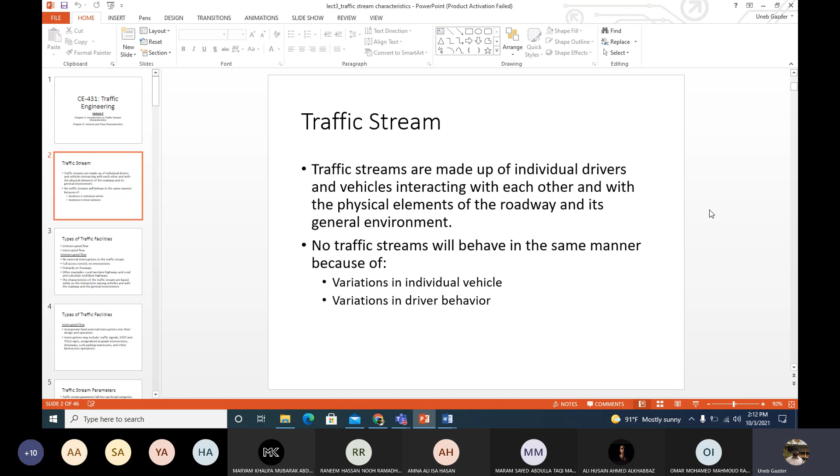Okay, so we don't drive properly at any time, right? One reason or the other. So driver behavior changes according to time and location and direction and weather conditions and so on. So traffic stream also changes. Because traffic stream is made up of vehicles and drivers, and these things change at different locations and times, we cannot expect the traffic to move in an identical manner at different locations and times.

According to traffic flow, we have two types of facilities: interrupted and uninterrupted. If you remember, in the first chapter, we discussed types of highways according to function. That was arterial, collector, and local roads, right? This classification is according to type of traffic flow you are allowing on the road. Traffic facilities are basically also highways, and when we classify highways according to traffic flow, we have only two: uninterrupted and interrupted.

Uninterrupted flow facilities are those facilities which do not have external interruptions. Now, what are external interruptions? Traffic stream, as I said earlier, is made up of vehicles and drivers, right? So any interruption which is caused by something external which is not part of traffic stream itself, like a stop sign or a construction activity, is an external interruption.

So a highway which does not have these things is an uninterrupted flow facility. Those highways do not have external interruptions, and they have given another clarification here, basically meaning no intersections.

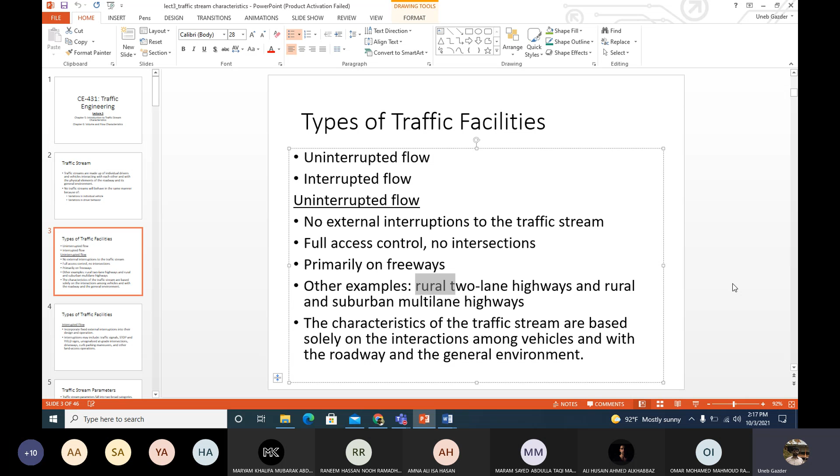Then we have interrupted flow facilities. Interrupted flow facilities have fixed external interruptions. The word external I've already explained. What we mean by fixed here is something which is present on the highway whenever you come there. So let me give you 3 examples and you tell me which one of them is fixed. A, interruption because of construction activity.

B is interruption because of a traffic accident. C is interruption because of a traffic signal. Which one of them is a fixed external interruption? Traffic signal. Okay. Anybody who has any other idea? Construction activities, Doctor. So you are saying A. Okay. Anybody who is saying A or B? Most of you are saying C.

C. Yes, you are right, C is the correct answer. Signal is the correct answer because construction activity is also not supposed to continue forever, right? It is supposed to end at a particular point, so it is not a fixed external interruption. So I think you have the idea from this example of what we mean by a fixed external interruption. So a traffic signal, a stop sign, a yield sign. American terminology is yield and the British terminology is give way.

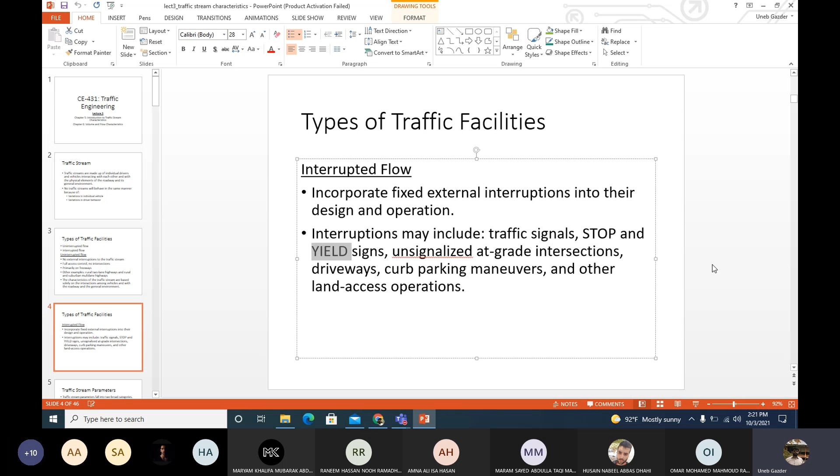Obviously, it is fixed. And any other land access operation: there's a gate of a house or a gate of a shop which is directly connected to your street or directly beside your street, a main gate, back door, side door, whatever. That is also a fixed external interruption. So all these are examples of fixed external interruptions. Highways which have these types of interruptions are interrupted flow facilities.

Then we come to traffic stream parameters. A parameter means something which is used to measure, data on an item which is used to measure something. For example, temperature is a weather parameter. You measure the intensity of weather using temperature.

Similarly, the level of water is a parameter for rainfall. We have that much accumulated water, so it's a rainfall parameter by which you can measure the rainfall. In the same manner, we have traffic stream parameters by which you can measure the flow of traffic. And these parameters can be macroscopic or microscopic.

Now, who can tell me the difference between the words microscopic and macroscopic? Just a word. What is the difference between the two words macroscopic and microscopic? Size. Micro is not visible to the eye. Okay, you are correct. It's size. Yeah, it's the general body. The main difference is the size.

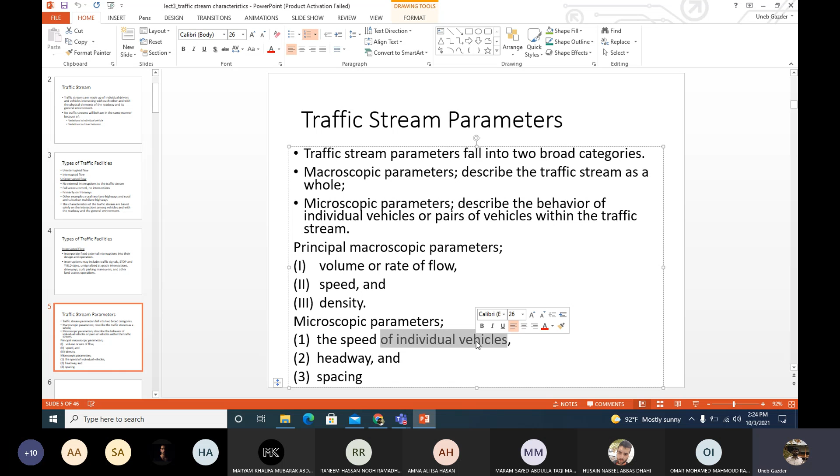What is the difference? When we take speed as macroscopic, that is the average value for all vehicles in the stream. So you measure different values and take the average, then you are giving me speed as macroscopic. And if you tell me that particular car had a speed of 60 kilometers per hour, you are giving me speed as microscopic, which is why it is mentioned clearly here, speed of individual vehicles. That is microscopic.

Now we'll start the discussion with macroscopic parameters, starting with volume and flow rates. Volume is a general term defined as the number of vehicles passing any stretch of the highway. That stretch can be one point, one lane, one direction or even both directions of the complete highway. Number of vehicles passing any stretch of the highway in a unit time. That is the general definition of volume.

Now the unit of time for which you are taking the number of vehicles can be different, and on the basis of that, we have subcategories of volume. So volume can be classified on the basis of the unit of time for which, obviously, this is done.

Can you hear me? Okay. Yes, Doctor, yes. Okay.

So when you say the word volume, now I'm coming to a more refined definition of the term volume. So volume is when the number of vehicles are measured or calculated for 1 day or 1 hour. So volume is when you are observing or measuring the vehicles for 1 day or 1 hour, vehicles per day or per hour. Okay, that is volume.

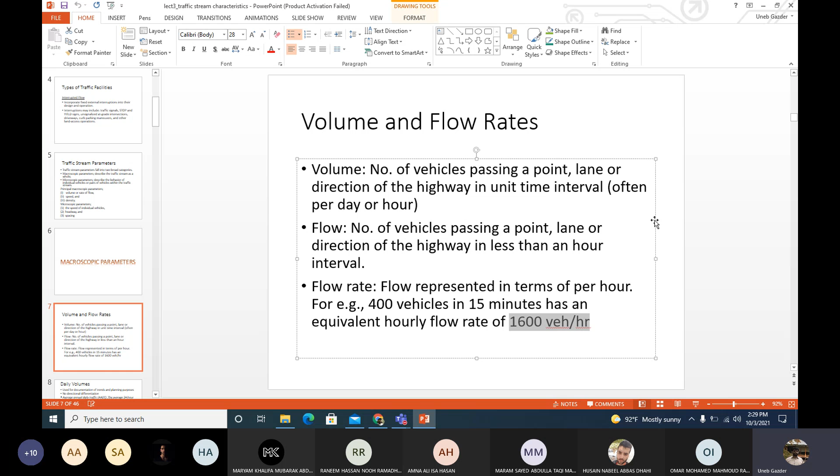So this 1600, which is calculated by using this 400, will not be called volume because that was not actually measured or observed for 1 hour. This is calculated using the flow. So we call it flow rate or rate of flow. So volume is when you actually observe or measure it for 1 hour, and rate of flow is when you took the flow value and you convert it to a per hour rate, that is rate of flow or flow rate.

Then volumes, like I said earlier, can be per day or per hour. So now we are talking about daily volume, volume which is observed for 1 day. Daily volumes are used for documentation, studying the trends, and doing the planning. So when you are observing the trend of traffic for, let's say, the last 10-15 years, then we use daily volumes to study those trends. Or if you are calculating volume for 10 years from now, 20 years from now, then you will also use daily volume.

Another important characteristic of daily volume is that it is the combined value for both directions. So you take the value from each direction and then you add them together for daily volume. So if I say daily volume is 30,000 vehicles per day, that is a combination of both directions. Maybe out of 30, 10 were in one direction, 20 in the other, but I will give you the combined value for both directions.

Daily volumes can be averaged in 4 different ways. You can have 4 different types of average daily volumes: average annual daily traffic, average annual weekday traffic, average daily traffic, and average weekday traffic. Average annual daily traffic, AADT. What does it mean? So you take daily traffic, meaning 24-hour volume, for all 365 days of the year. If it's a leap year, then it will have 366 days.

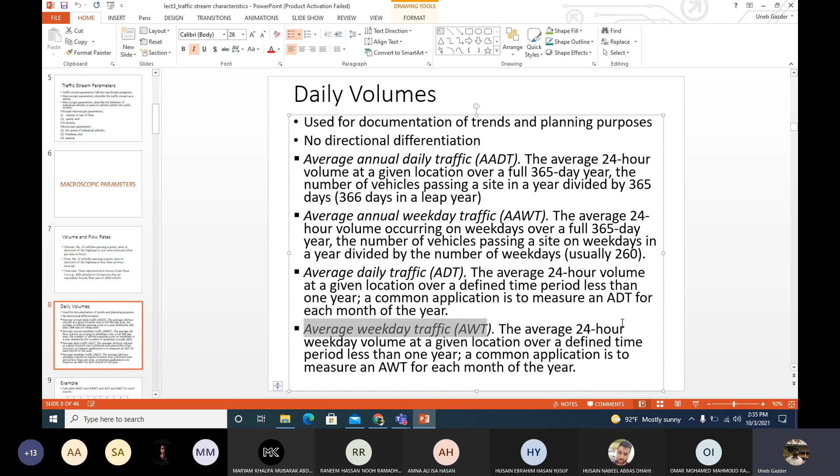And if from that data taken for less than 1 year you exclude the weekends, it becomes average weekday traffic. So average annual daily traffic for the entire year, average daily traffic for less than 1 year, but it's the total traffic divided by the number of days for which you have taken the data. Average annual weekday traffic for the entire year excluding the weekends, average weekday traffic for less than 1 year excluding the weekends. So these are the average daily volumes.

So for a particular location, the entire data is given in this table, for each month. Column 1 is the name of the month. Column 2, number of weekdays in that month. Column 3, number of total days in that month. Total days are fixed for 11 months of the year; they can change for February, sometimes 28, sometimes 29. But the number of weekdays you have to count, since each month may have different weekends each year.

Then we have total monthly volume in column 4, the total volume for January weekdays plus weekends. In column 5 we have the total weekday volume, so 208,000 is the volume only on the weekdays; the weekend volume is subtracted. Now for this location they are asking to calculate AADT, AAWT, ADT and AWT. These are very simple calculations, but they may help you clarify the concepts.

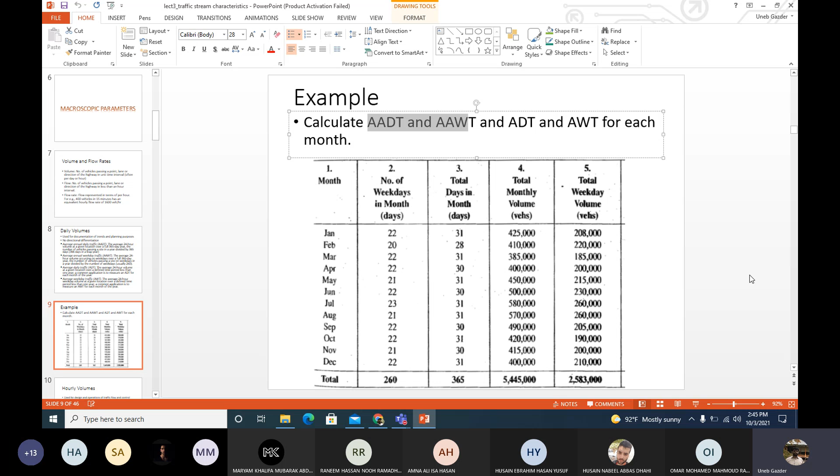Then the next thing is volume taken for 1 hour, hourly volume. Hourly volume is used for design of highways and design of traffic control devices. So if you're designing a highway or a traffic signal or a roundabout or any such facility, you will be using hourly volume.

I will take the hour which has the highest volume in the day, the single hour which has the highest volume, and we call that hour the peak hour. I'm sure you have heard. Hourly volume is taken for the peak hour and it is taken for design, and hourly volume is taken for a particular direction, the direction which has more volume.

So in the whole day, you will see which direction has more volume as compared to the other, and the hourly volume will be taken for that direction for design. So if I say 2000 vehicles per hour, I'm talking about the volume of a particular direction. It's not the total volume of both directions.

Now you must have seen the highway design doesn't change from one direction to the other. Although we are taking hourly volume for one direction, the design doesn't change. So you will not see 3 lanes in one direction, 2 lanes in the other, for a simple highway segment. Why? Because traffic flow reverses at different times.

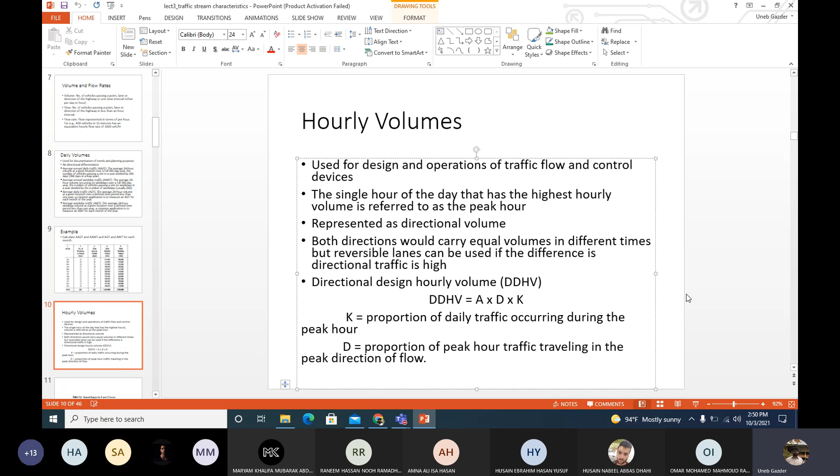So out of the total traffic, how much comes in the direction having the higher volume? That is the D value. And how much percentage of the whole day comes in the peak hour? That is the K value. Okay. Now from where do I get K and D? We have a table. So in this table, you can see the values according to type of facility and location.

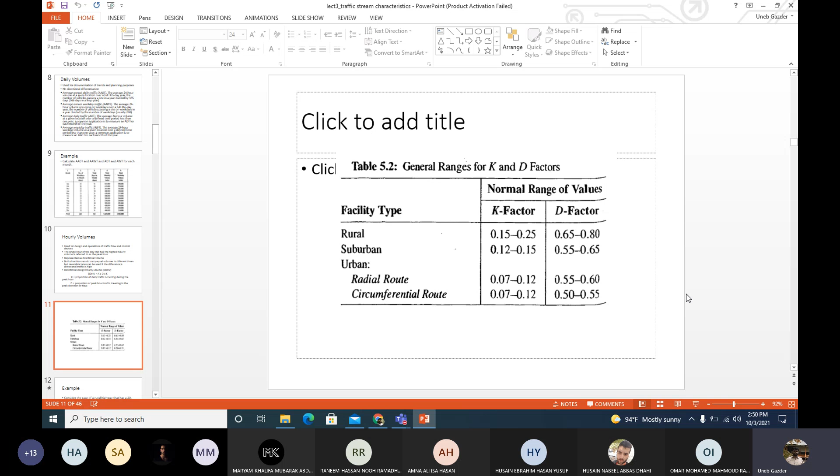So for example, you see the values for rural areas, suburban areas, and for urban areas, we can have a different range for radial route and circumferential route. What do we mean by radial and circumferential? So radial basically means, let's say this is the city. Radius means a line which goes from center to the boundary, right? So a radial route is one which goes from the center of the urban area towards the outskirts, towards the boundary. If you're designing such a road, that's a radial route.

Circumferential goes around the boundary, along the boundary or around the center. A road or route which goes along the boundary or around the center. So if you're designing a road which goes around the center or along the boundary of the urban areas, that is a circumferential route. So on the basis of location and route, you can decide the value.

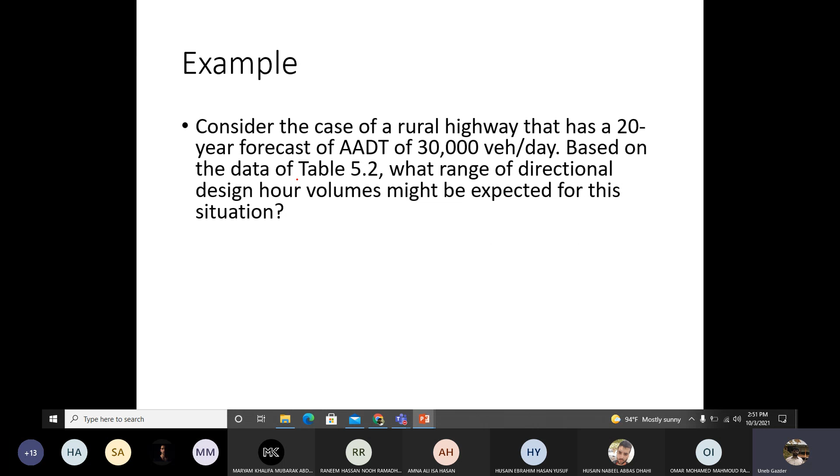It's a very small example. I will go through it. Just give me a couple of minutes. We have a rural highway. 20-year forecasted volume is given, AADT. That is 30,000 vehicles per day. So in the next 20 years, we are expecting this much AADT. Using the data of table 5.2, the K and D values from this table, find out the design directional hourly volume that is expected on this highway.

So using the factors for rural highway, K ranges from 0.15 to 0.25 and D ranges from 0.65 to 0.8. So if I use the lower values first and calculate DDHV, AADT multiplied by K and D, I get 2925 vehicles per hour. And if I multiply with the higher values in the range, I get 6,000 vehicles per hour. So the DDHV range for this highway can go from 2925 to 6,000. This is a big difference, more than double. So the value from the range can actually affect your design hourly volume a lot.

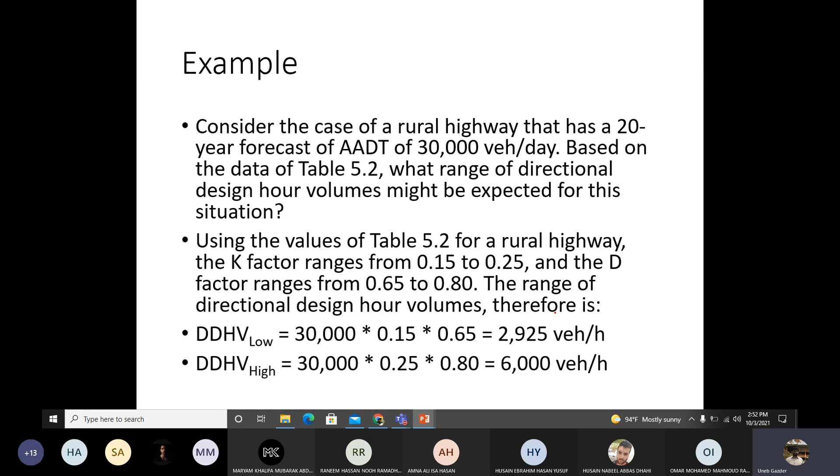So which value from the range should we pick? Usually it's the mid value. So instead of using 0.15 or 0.25, I will use 0.2. Instead of using 0.65 or 0.8, I'll use their mid, which is around 0.72 something. So this is the common practice, take the mid value. But if you have data about the population, then higher population means lower value in the range.

K and D factors are inversely proportional to the traffic and population demand. So you see, when you go from rural areas to urban areas, the values in the range are decreasing. Why? These factors are indicators of traffic flow uniformity. A lower value means traffic is uniform over more hours of the day and in different directions. So when traffic demand is higher, we have more uniformity, less variation, and vice versa.

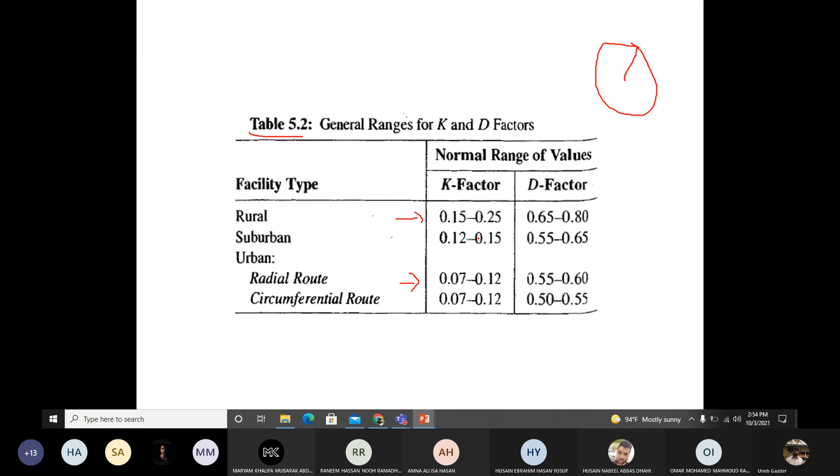So if you have data about the population demand and traffic demand, then for higher population and traffic demand take a lower value from the range, and vice versa. And I'm talking about the same range, not different areas, because for different areas we have different values. So how to pick the value from the range? Depending upon traffic and population demand. And it is a reverse relationship.

Okay, now I'll stop here. Any questions, any queries, any suggestions, anything you want to say, please go ahead.